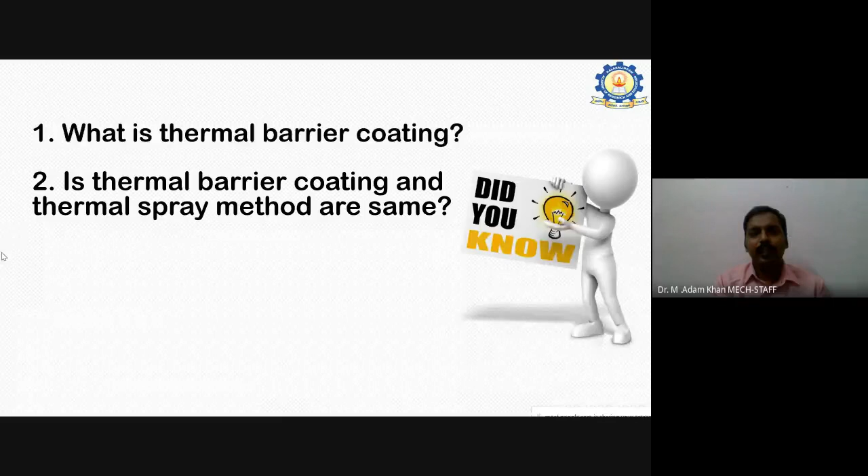Next, thermal barrier coatings and the thermal spray method. Are they both the same, or do they have any differences? Because people used to say, when we go for any coating, I have applied thermal barrier coating. What is called thermal barrier coating? You can go for different applications, different materials, but the application is different and the process is different. Okay, so do you have any confusion in this, any conflict in this? So you should be very clear on these two, right? So thermal spray method and thermal barrier coatings, are they the same? That we have to understand from this lecture.

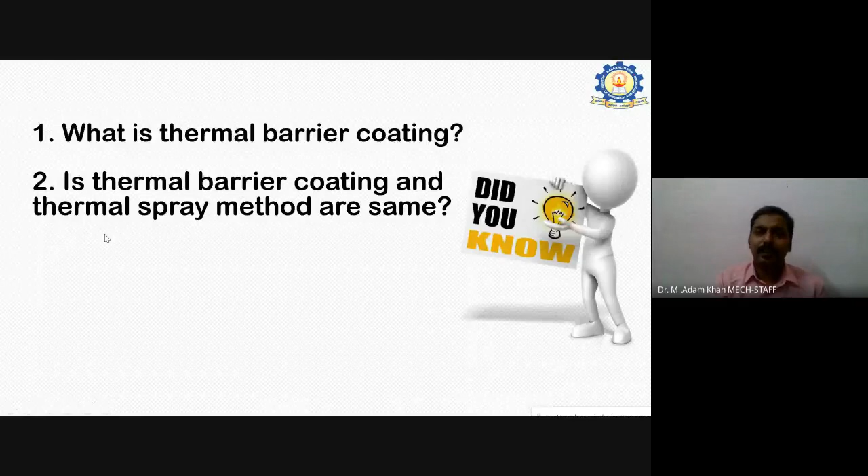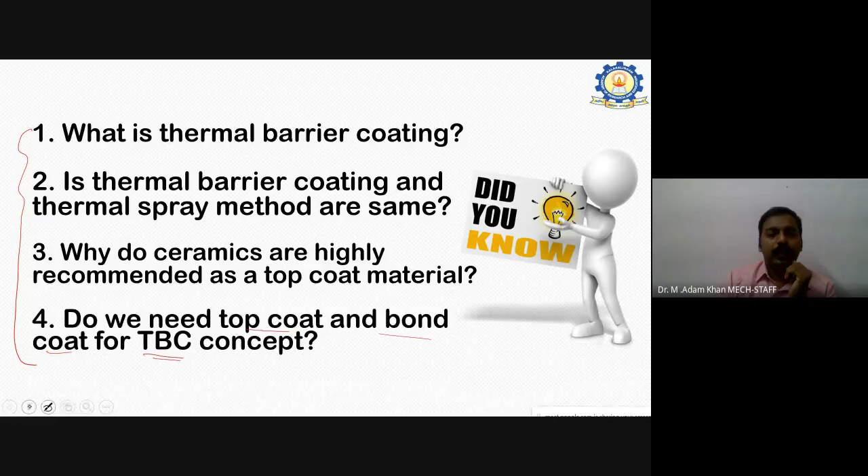When we go out, the sun rays' radiation should not burn our skin. So radiation, or the heat available in the environment, the ambient, should not spoil the natural built structure. So that is the main motto, nothing more than that. If it were for smartness or aesthetics, he wouldn't apply it like this, or it would be just like lipstick or lip gloss. When I was in Johannesburg, people used to walk around with their lip balm. I was surprised. Why would you guys like to take that lip balm anyway?

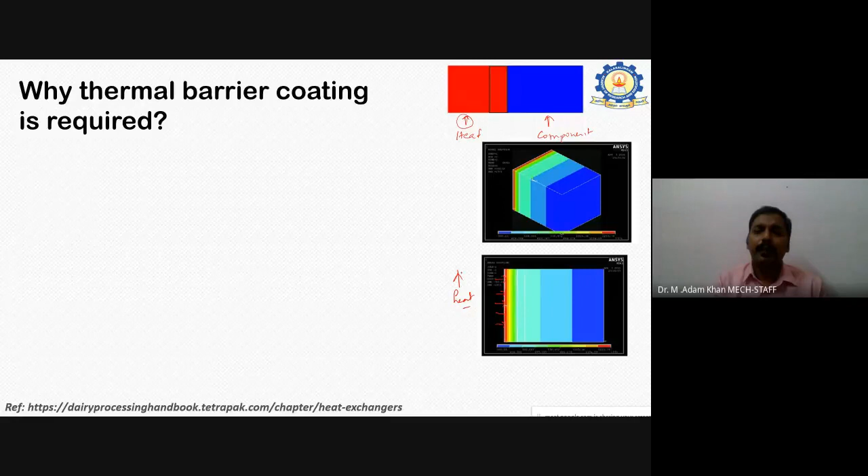So we have to protect this component working at elevated temperatures. For this, they have developed the thermal barrier coating. Just like the simulation, this is the main explanation. You can see that this is X temperature, and this is the component, your work or substrate, whatever it is. It is subjected to some X degrees centigrade, for example, 1000 degrees centigrade.

If it is at 1000 degrees centigrade and the material is directly exposed to this condition, what happens? If it is iron or nickel, it goes directly to recrystallization or some melting phase. So metallurgical phase transformation is directly involved, and the metallurgical deformation and degradation starts. We cannot expect that component to have a reliable life. To increase the reliability of the life and to reduce the temperature, they are producing these barrier coatings.

This is called the top coat, coating 1, and this is called the bond coat, coating 2. The top coat will mostly be a material used as an insulator or a packing material. So ceramics are widely selected, since they try to dissipate the heat maximum. That is why ceramics are widely used in the top coat. So the heat will be suddenly reduced by some amount Y, so X minus Y.

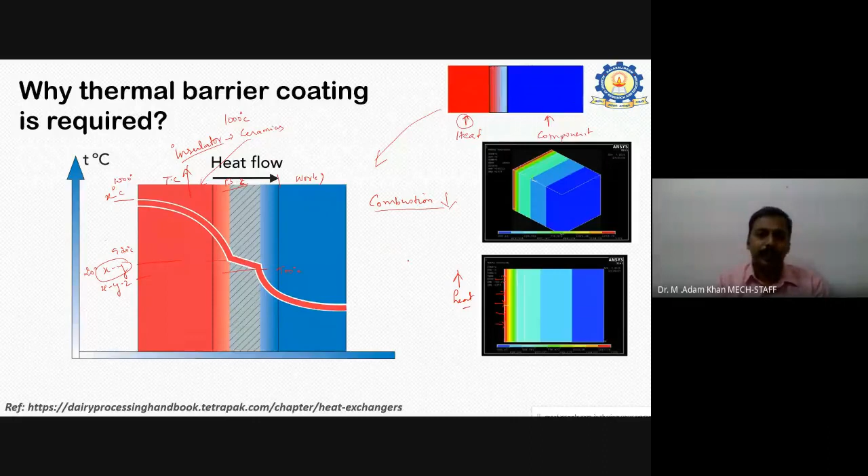Since we are going for thermal barrier coatings for high temperature, elevated operating conditions, thermal barrier coatings are used in the hot section. This is a good example for a turbine blade.

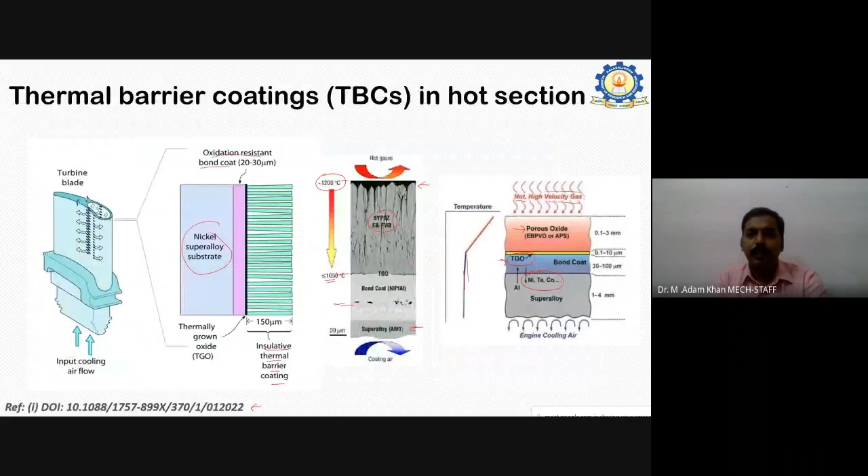The gaseous state process includes ion beam assisted deposition, chemical vapor deposition, and physical vapor deposition. Mostly people go with physical vapor deposition for coatings. This is also possible, because this coating which I have shown here is from an electron beam physical vapor deposition process. I'll show you why PVD and thermal spray techniques have controversies - I'll explain that, which is the main motto of the research.

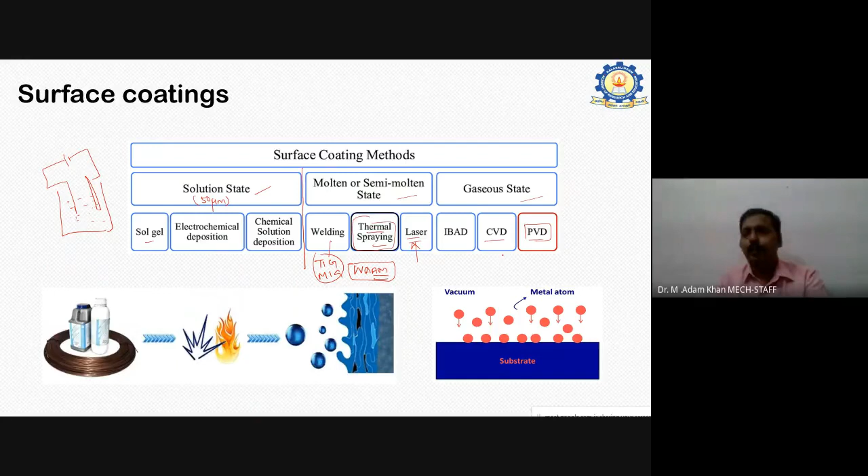Surface coating has different material concepts, and each has its own uniqueness. With this laser and welding process, you can coat stellite materials, steel concepts, stainless steel, nimonics - all metallics can be done here. Even nickel is tough here, somewhat, but the removal of residual stress in this laser process is a main issue, though we can do it to some extent. Then electrolysis plating, just as normal as you do it in the chemistry lab - this is a very common one.

Digging mines will be having hard abrasives in that, sulfur content will have to be there. So different environments are focused, and for that they have done thermal spray coating only. Okay, so CVD, PVD is another concept.

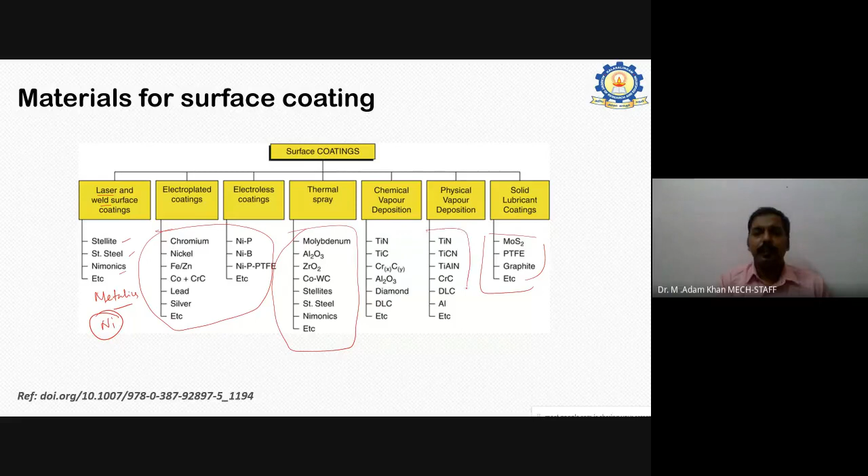So here PVD and thermal barrier coatings are the two main topics which I used to focus, and they have given wonderful contributions in the research of high temperature corrosion studies.

Okay, so materials for thermal barrier coatings have three stages. As I said, it has one top coat, second is called bond coat, another is called substrate. So top coat, maximum the people use ceramics. All types of ceramics are widely used. What is the main reason? The only thing is it is an insulator, it can reduce the heat.

It can reduce the heat, the latent heat of transformations. It will be controlled, it doesn't allow other elements to pass very fast. It has to protect the component in such a way, just like powers, that is just like a ninja power or ladies superhero powers, just like that.

So bond coat is to protect the component. This will protect from the environment, this will protect the material. This is mainly for oxidation.

Okay, so that is why corrosion resistant materials are widely used. Chromium, nickel, cobalt, these are the main components. They are highly resistant towards oxidation and corrosion, and these are highly resistant for thermal insulating. These two are widely used as the top coat and bond coat.

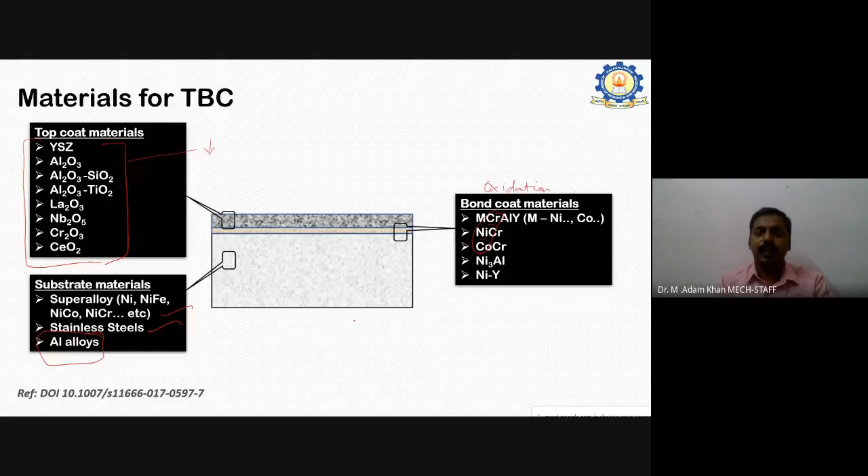So to control that, aluminum structures are also done. So we have just stepped on that to do something else, so even aluminum can be done. Only thing, we should not try this TBC with magnesium alloy, because pre-processing is very important there. This TBC is at heavy temperature, I'll show you the temperature rating. At these temperatures, this magnesium alloy does not have stability, it will burst, and it should not be a trial job, or there should not be any blasters happening recently in a global scenario, just like that, it should not be there.

So thermal barrier coatings are classified in different ways, just like combustion method, electrical method, and high pressure method. Combustion is nothing but there will be some detonators or igniters. In this, D gun, detonation gun is used. So maximum explosives are used as combustion material here, they are otherwise called the D gun process.

Okay, detonation gun. Flame spray, normal gaseous fuel or any sort of liquid fuels can be used. So flame guns are highly used here, they can use the materials in the forms of wires or powder. So this is the second stage.

Third is called high velocity oxy fuel or high velocity air fuel. So for velocity, they are using oxygen or air, fuel can be anything else. So with the help of fuel, any sort of fuel, you can increase the heat energy to fuse the material and deposit it. I'll show you how it has been done.

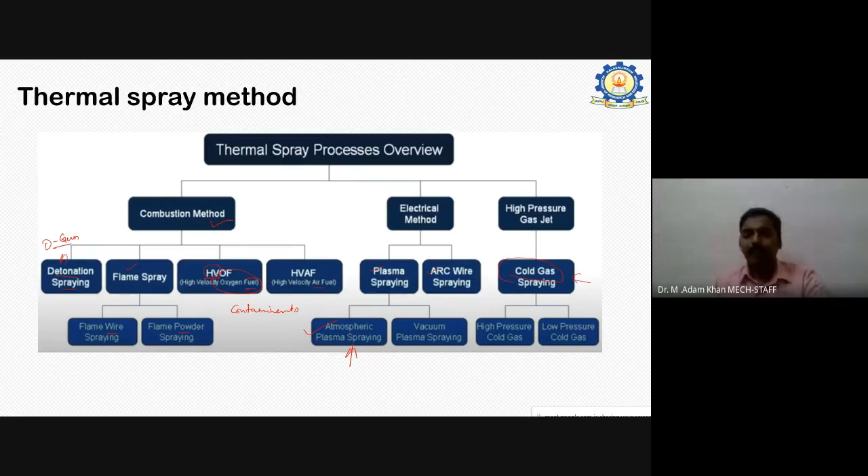The people in India working on the cold spray method are very few. If you're interested, you can try to do that. There are no issues. It's a challenging one for the beginners.

Okay, right. Next is coating materials. The thermal spray method, I'm going to explain it here. The first one is called coating material. Coating material may be in the form of pellets or a wire or a powder or whatever it is. That material should be selected, and based on that material, you have to select the process. That's a very important one.

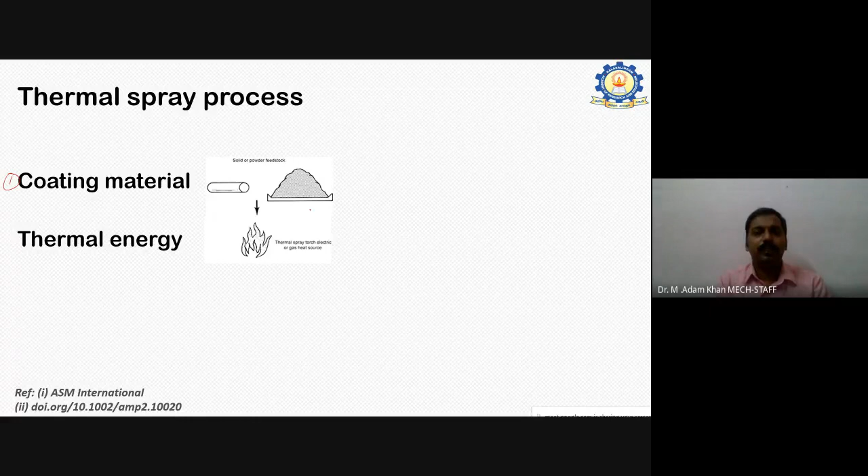The process is nothing but the heat energy, how you are going to generate the heat. It may be HVOF, flame, D-gun, plasma spray, or the systems which are available. If it is metallic, the thermal energy required for fusion will be different than for ceramics. The rate of fusion is different for metallics and ceramics, so based on that only you have to select. That is the second one, thermal energy.

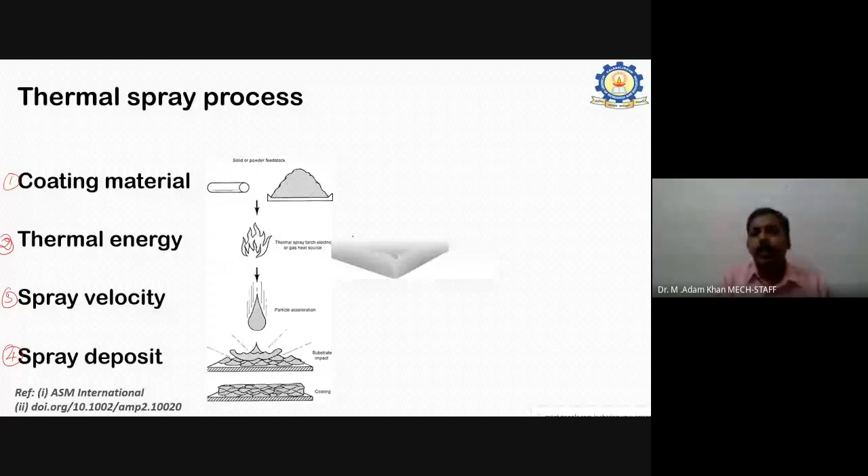Third one is called spray velocity: at what velocity this fused metal will be deposited, just like splats. Then spray deposit, that is the fourth case: how far it is going to be deposited, velocity, what is the thickness or the structure, or the job where you have to place it. So with all these four factors, you are going to make a proper thermal spray process.

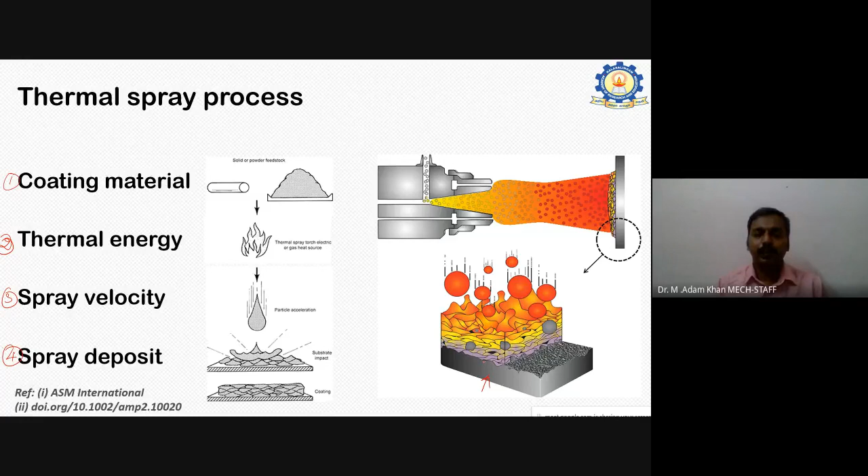If you check the structure, you can see there are so many step-by-step layers, built layers, added layers, which is because of atomized metal particles or ceramic particles fused and deposited at a higher velocity. It will have good metallurgical bonding because pre-treatment will be done around 400 to 500 degrees centigrade based on the substrate. That is the thing which has to be noted here.

Next, there are so many torches. If you are going for flame, it will be one. If you are going for powder feed in the flame, the torch will be one type. If you are going for wire feed, the torch will be different. If you are going for plasma gun, the electrode will be different because it is igniting electrodes, so there is no gas. If you are going for an arc process, you have to give a feed of wire, and then a feed of your heat energy source.

If you're going for cold spray, the concept is different. If you're going for HVOF, you have to give an ignition coil as well as a cooling coil, and then your powder spray separately. So with reference to the concept, there are so many torch facilities, and you have to handle them properly, just like a welding electrode. FST.nl has a wonderful website to teach us more about thermal spray torches.

So what is the torch doing there? In this torch, the material is taken inside in one form, and energy is taken in another form. It fuses it, and the fused metal is blown at high speed to stick it over the object.

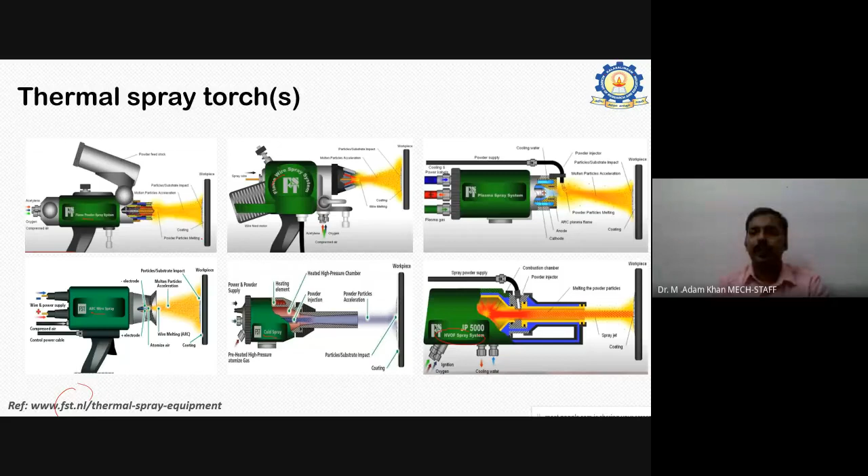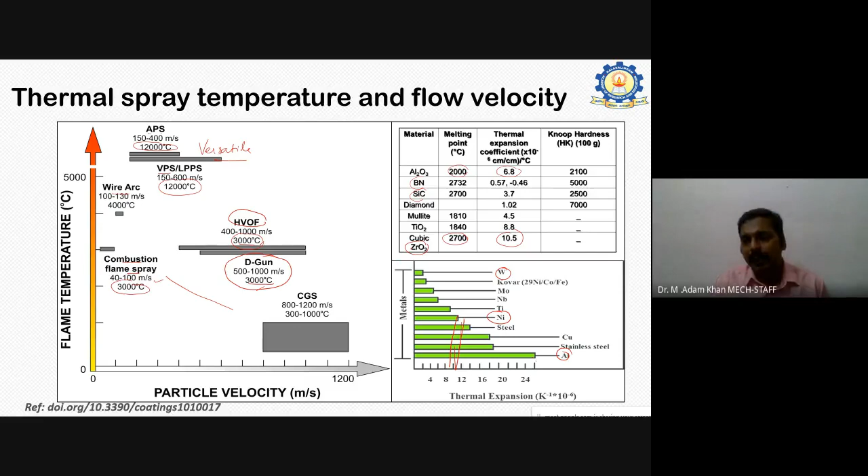Okay, tungsten, it won't expand, very tough. But at the same time, when you go for aluminum, the expansion is high. See, it is around 24. If you go with silicon carbide, it will be just like a reinforcement. So thermal expansion rate is another important factor we have to note when selecting the material as well as the process. You have to note these things. Okay, right? So this is the thermal spray coating.

This is my job. This is Inconel 617, the superalloy substrate, on which I have done two coatings. One is nickel chromium, as well as chromium oxide. I have done two coatings for my research. One is pure ceramic coating, that is alumina and titania. That is why in my profile, Maharajan sir read A40T.

A40T means alumina with 40% titania. Okay, alumina having 40% titania, 60-40 ratio. So ceramic, pure ceramic as one coat, and the second one is called a two-way coating method. One is bond coat, another one is top coat. For the bond coat I used nickel chromium. Second, I used the top coat as chromium oxide here, Cr2O3.

You can see the differences, the ceramic and this first coating and second coating. The main difference is here, there is no ceramic in mine because it is a metallic oxide. This is not a ceramic. This is also pure metallic. So there is no sort of alumina forming even when it is exposed to higher temperature. I have not taken yttria. I have not recommended zirconia. I have not recommended any sort of ceramic forming oxides in my coating. This is the main research I have done in my PhD.

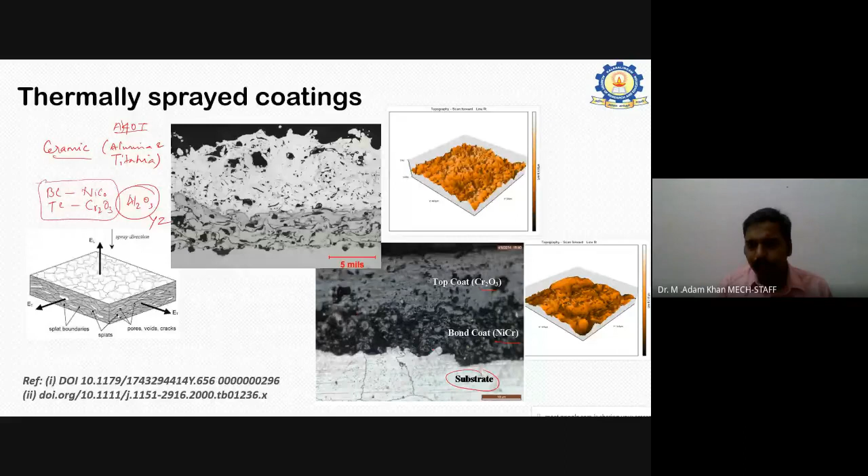So factors to be considered here. I'll say one more thing. While depositing, we have to take care of the splats. What is the thickness? What is the number of splats? The coating splats should be equal. You can see these splats. These are coating splats. I'll show you the top surface photo also. You can see this one, this is oxide coating, and this is metallic coating, how it has been done. I'll show you the same images.

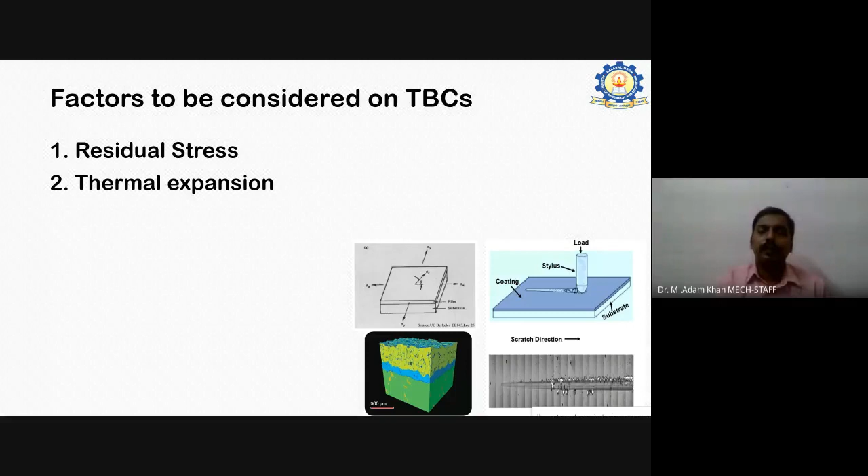So while making any thermal barrier coatings, you should keep some points in mind. One is residual stress because of heating or any sort of thermal cycling. It should not have residual stress. Next is thermal expansion factor. Coating density and porosity, how to reduce it, then adhesion and delamination, oxidation, corrosion, tribological properties.

For example, when we are talking about this, you can say this when it is a bulk. If I'm talking about this one, see this is having two layers here. When it is projected in three dimensions, it is having two layers, just like this. If I talk about the stress of the substrate and coating, sigma x or sigma y, what is happening? This will have a stress with reference to the x and y direction, and this will also have a stress with reference to the x and y direction. So this can be for the coating, and this can be for the substrate.

We cannot say that the strain in this material is the same as the strain in this substrate. Coating strain and substrate strain are different. For example, if I want to check the strain for any bulk material, stress by strain is Young's modulus, so strain is stress by Young's modulus. I cannot equate the strains, but I can equate in terms of stresses. The stress induced here will not vary, but the strain induced in each is different. So when talking about residual stress, you should note whether you know the stress of the coating or of the substrate. If it is known, you just subtract it.

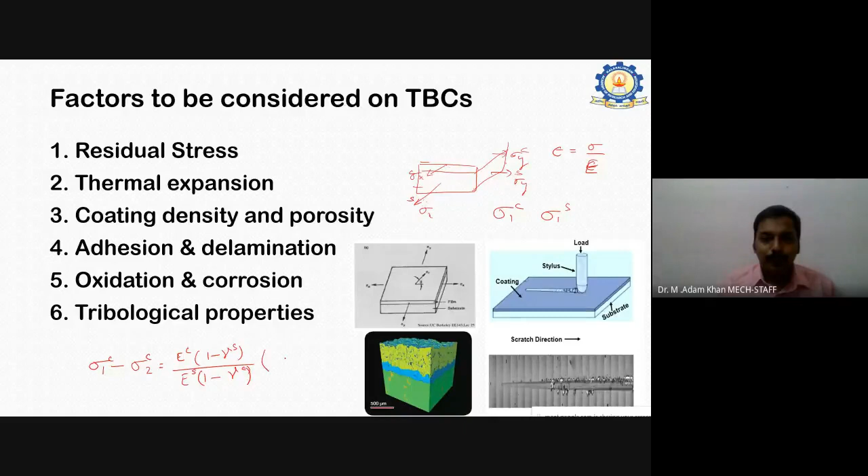If I want to find the stress for this object, I can write it here. So sigma 1 is known. Sigma 1 minus sigma 2 of the coating equals Young's modulus of coating into 1 minus Poisson's ratio of substrate, divided by Young's modulus of substrate into 1 minus Poisson's ratio of coating, into stress 1 of substrate minus stress 2 of substrate.

A very simple relation. This is my current subject which I am handling for my BTech students, engineering stress analysis. If I want to find the difference in stress for X and Y of the coating, I can use this simple relation.

With this simple relation, you can find the Young's modulus of any ceramic or substrate, and you can find the Poisson's ratio of any ceramic and substrate. At the same time, you know the stress induced in your substrate, in the X direction or Y direction. With this, you can find the difference. This is called change in stress. This is very easy. The residual stress can also be found with the help of this formula.

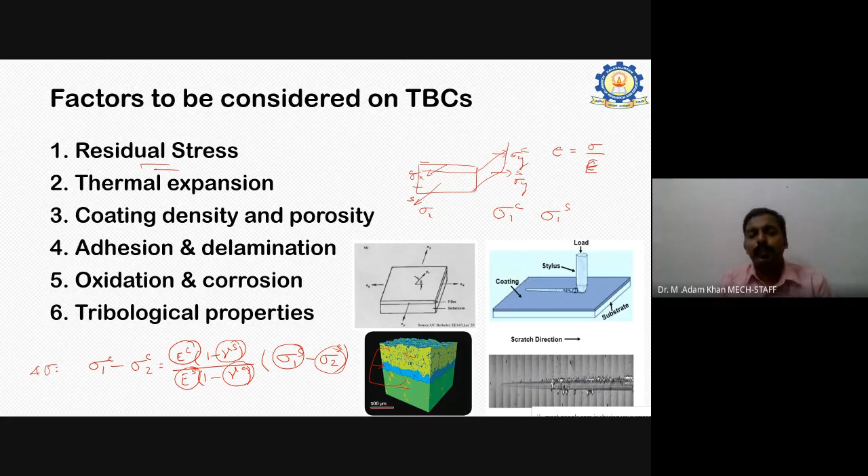At the same time, we should take care of the thermal expansion. As I mentioned in the earlier slide, the thermal expansion rate of the substrate material, coating, and bond coat, you have to take care of all three together before making it. At the same time, you should note whether the adhesion and delamination of the coating is not compromised. For that, we have to go for proper scratch tests, or abrasion tests or indentation tests can be done. Oxidation and tribological properties are the main motto of the research involved in thermal barrier coatings.

Okay, right. So far we have said what is the thermal barrier coating, thermal spray methods, thermal barrier coatings. So far, okay, fine. Understood, I think so. If you have any doubt, we can discuss it. No issues. If you have any doubt, please stop me immediately, because on my full screen I cannot see anyone. If you raise your hand or put a message, I cannot see it. So please unmute and you can ask a question.

So far you have seen the thermal spray method for thermal barrier coatings, but in the early days people used to make thermal barrier coatings with EBPVD, electron beam physical vapor deposition. The structure of a thermal barrier coating developed through electron beam physical vapor deposition will be just like this, a broccoli. At the top, you can see so many pores and voids, which have a higher surface tension to lead the fluids or gases floating over the top surface towards this. Not only at the top, you can see here how the gaps are created in this EBPVD. This is a fresh thermal barrier coating.

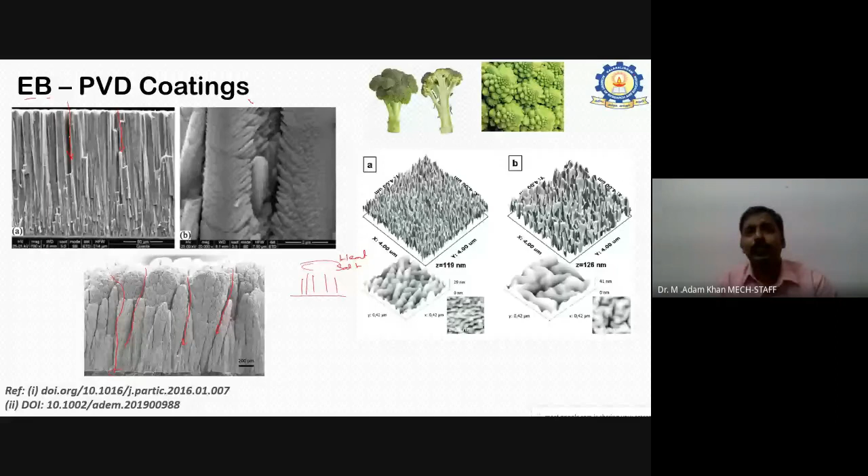So what happens here? When something is left there, it will take the solution or make the elements pass from here towards the substrate, the adjunct layer. Instead of making the surface contact direct, you are creating capillarity for flow to the surface. It may be heat or it may be salt. You're making the oxidation reaction or corrosion reaction speed up. That's all. This was the very common approach in the early days. That is why research turned to making thermal barrier coatings with the thermal spray method. This is the comparison here.

This is the thermal spray method, how it has been done, and this is the electron beam PVD method, how it has been done. In the thermal spray method, you can see the structures in the form of splats. Here you can see the structures in the form of columnar structures. That is the first and foremost difference. Second, the heat energy facing the environment has to travel through so many layers. You can see layer 1, then it has to cross like this, then cross again. It has to find so many paths to travel from the top towards the bottom through so many layers and structures. After that, it has to reach the adjunct layer called the bond coat.

At the same time, here in this case, it is very fast. It has capillarity. If heat energy is produced, all the oxygen will be evaporated. So there will be a flow of fresh oxygen, or the oxygen developed will be taken in by the material. So degradation starts very slowly here, and here the degradation starts very fast. That is why here the thermal conductivity is very low, and here the thermal conductivity is very high. So this is not highly recommended. In the early days people used to make these kinds of coatings, and later it changed to the thermal spray method like this.

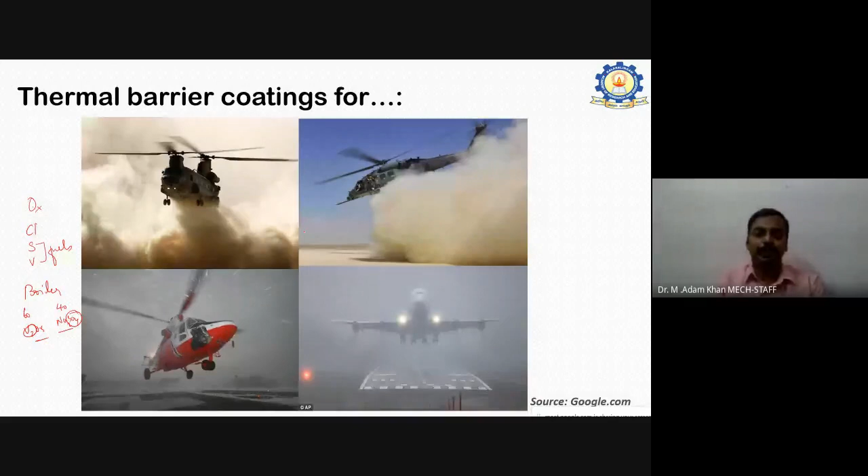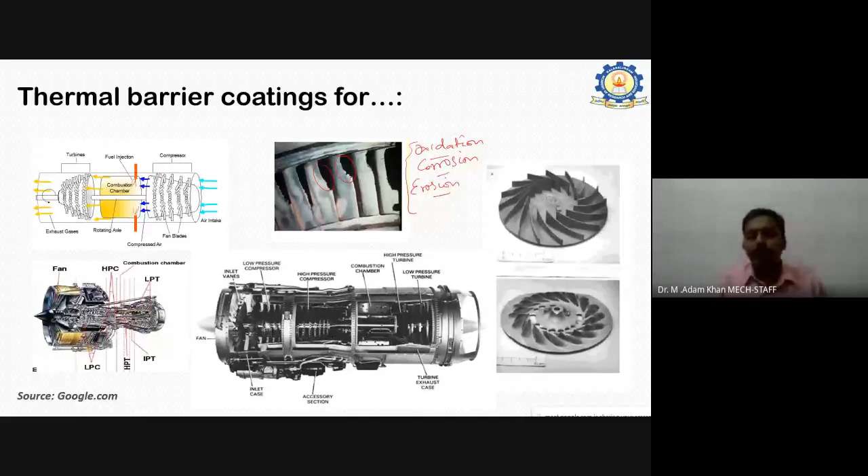It has to face corrosion, and continuous operation will lead to erosion. So these three are the main conditions suggested for thermal barrier coatings at elevated temperatures. This is not only for turbines; you can see it in mines, in underground boring, because there is also that much heat generated while cutting the rocks. Everything is there.

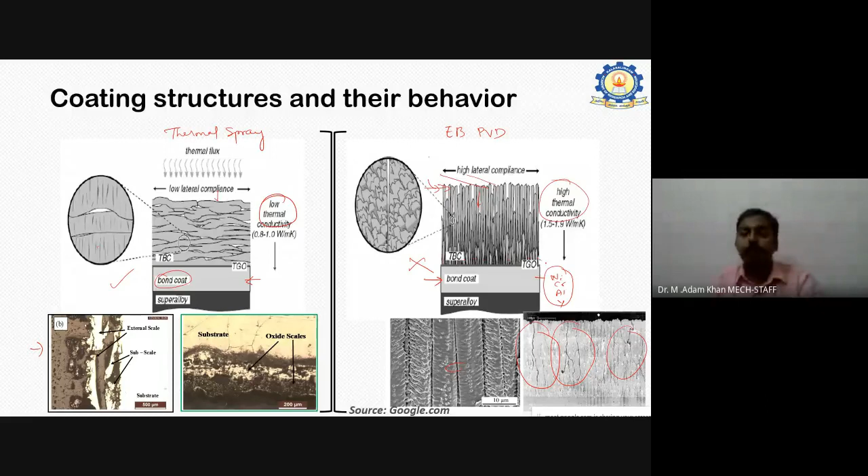These oxides will not be connected to the ceramics because these are metallic oxides, and these are ceramics, so they don't have that much link. The growth of these oxides will proceed layer by layer, and at some point it will break the top coat, and the total component is exposed to a severe corrosion or oxidation environment or mechanical failures. That is the main objective of the research I did in my doctoral time.

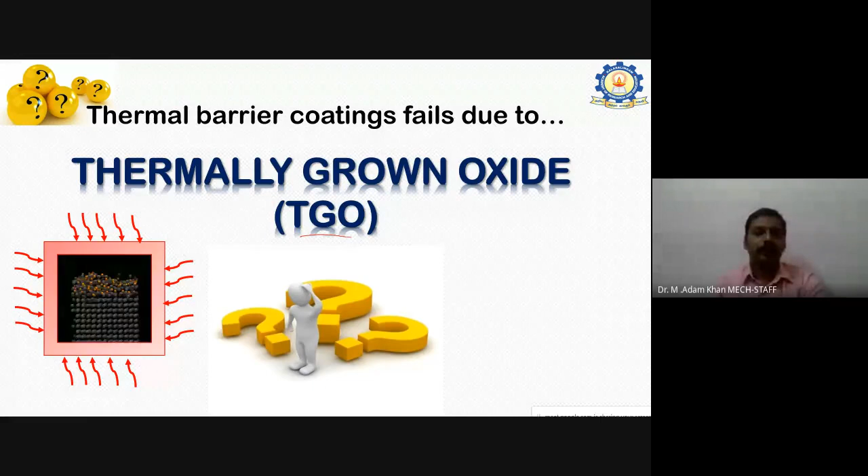Okay, so this is the basic. What is happening? This is the ceramic coat. This is the metallic coat and substrate. The ceramic, as we already said, is porous or less porous, whatever it is.

Sir, your voice is breaking. Sir, your voice is breaking, please.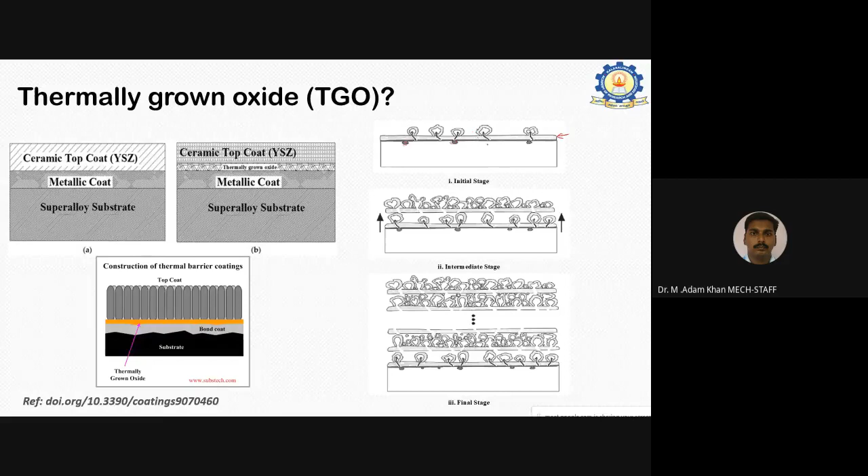How is it happening? TGO is growing, so you can see this is the oxide scale. Sorry, this is the coating, the top coat or ceramic coating. When the coating has these micropores, the oxygen moves towards the substrate, and it starts to make a localized corrosion at the pores or voids. It will produce a uniform corrosion called an oxide film, that is called TGO.

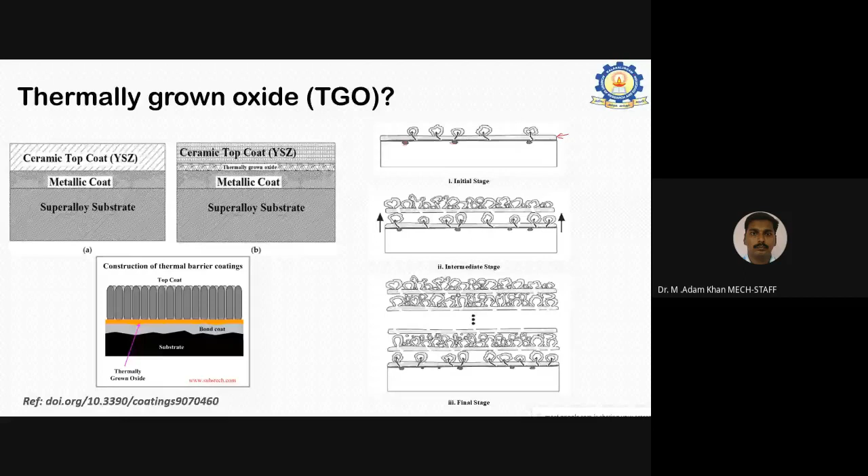When the oxide grows up, what happens? It will shift this coating layer from the substrate to the top, it will raise it, just like a mushroom, and it takes up the coating out of the bond coat.

What happens to the bond coat next? If the top coat is gone off, that's all. All the heat exposed will be directly imposed towards the metallic bonding, and oxidation starts rapidly. So continuation of this exposure will produce a multi-scale oxidation.

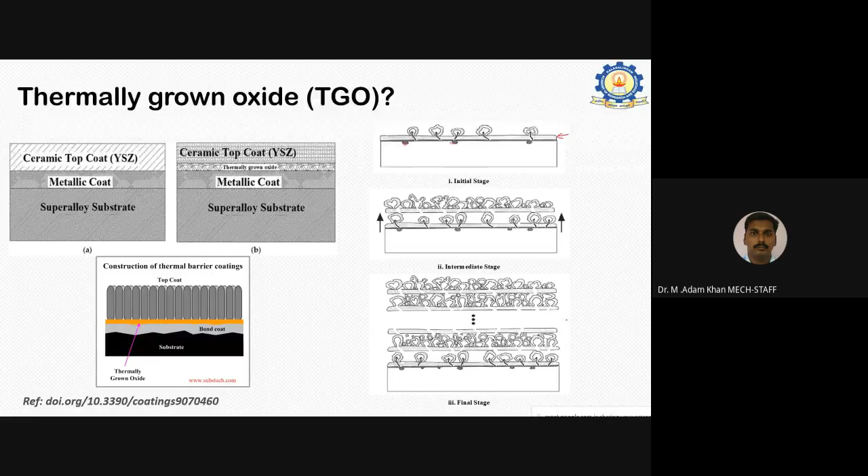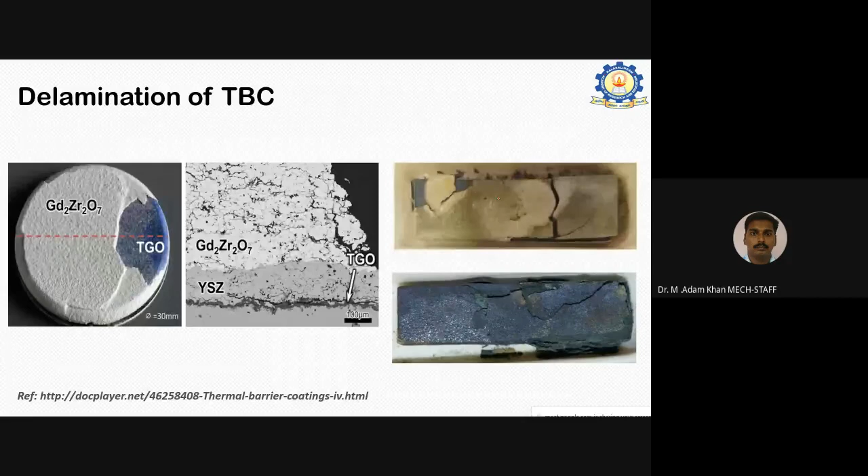So what I have done in my research is two coatings. One is called alumina titania single coat, not a double coat, just a bond coat and top coat. I have done one more thing, nickel chromium and chromium oxide. I have excluded alumina or any sort of ceramic forming oxides.

If I have this one, conventional nickel chromium aluminum yttrium, when it takes to the oxides, what happens? This aluminum will form Al2O3. If yttria is there, Y2O3 will form. So I've just avoided taking these off as a TGO.

So from the research I found the aluminum content or ceramic contents are the main drawback, or they are the culprits that make this TBC fail the fastest. So I just decided not to use these culprits here in this condition. Culprits means, for example, I'm telling for these conditions.

So next condition I have taken pure alumina titania. People used to say that titania is a self-cleaning material, and yes, it is. It won't allow any sort of salt or anything else to accumulate, because of heat it will be exposed. So adding titania will increase your density and reduce your porosity. That is very important.

So before doing my research, I could see Al2O3 plus 13% TiO2, 13% titanium oxide being used. After that I thought, why minimize the titanium? Why not go with 40% titanium? I thought this titanium may increase the bonding strength as well as reduce the surface tension, giving the self-cleaning property. So I did that 40T, that is alumina with 40% titania.

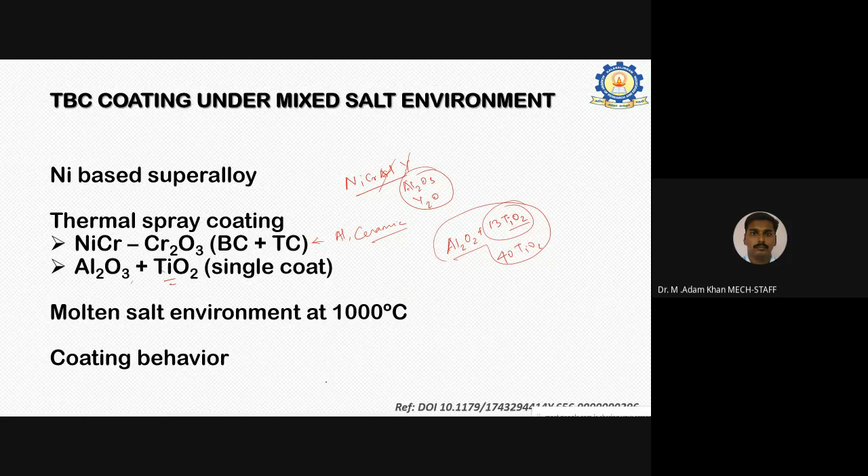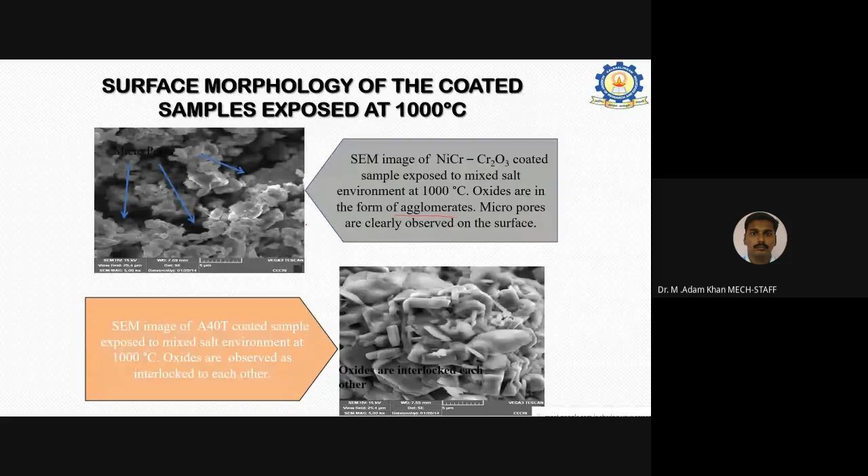When it is exposed at 1000 degrees centigrade, you can see these oxides are in the form of agglomerates. Micropores are very clear. And this is for alumina titania, see how this coating has turned out like this.

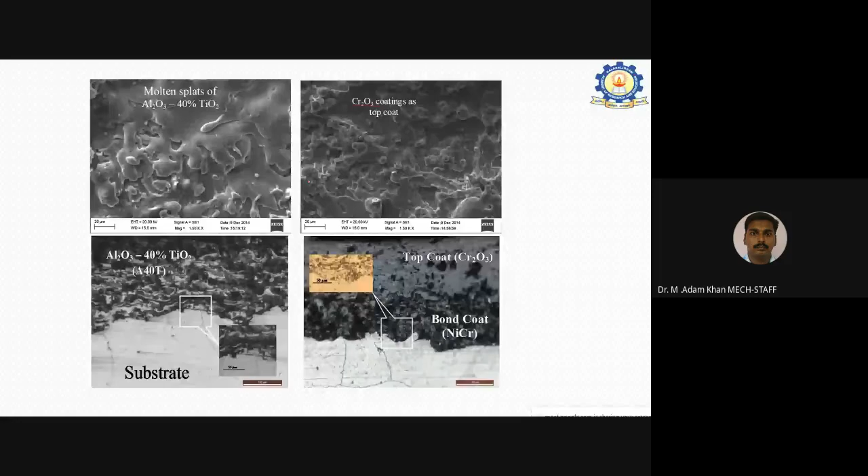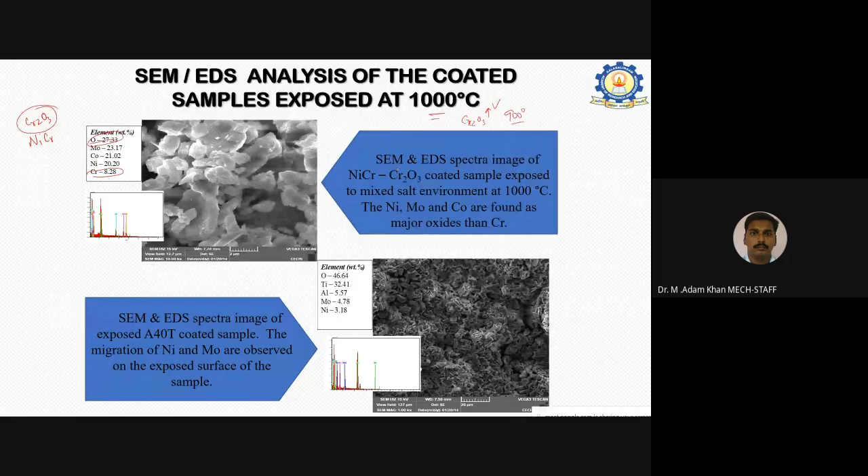One more thing I noticed here: I had chromium oxide and nickel chromium as the bond coat. So this is 100% oxygen and chromium. You can see chromium has been lost. At elevated temperature, chromium has a wonderful material property. When it crosses the eutectic limit around 900 degrees centigrade, chromium oxide, Cr2O3, starts to evaporate as a vapor. That evaporation protected my surface for a long tenure. After that evaporation only, my coating got sustained.

So this is the cross section. This is the substrate, this is the nickel chromium bond coat, and this is called the top coat. The other things are epoxy. At the same time you can see this is alumina titania, so this is ceramic as usual. The ceramic plays a part to make micropores inside to form a TGO. So this is called substrate, and this level is called TGO. For the same condition, see the behavior, how it has happened.

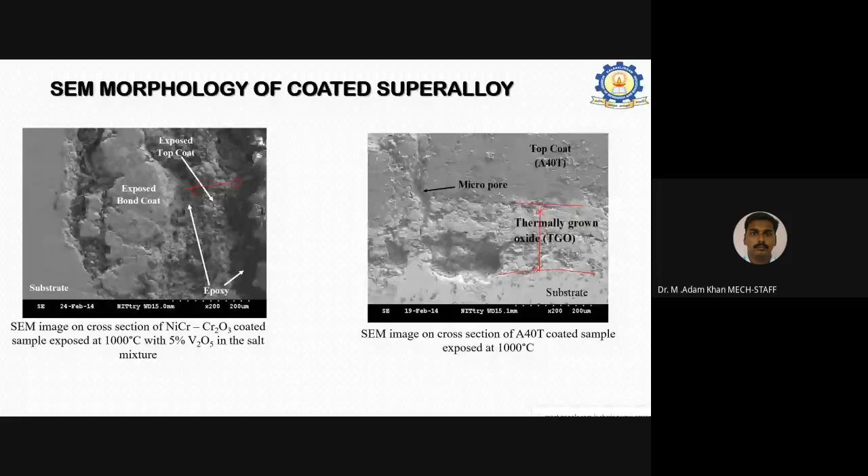Here, the topmost chromium oxide layer has elapsed. So just to identify again, I have done EDAX results here. This is called epoxy, that is why it got charged while taking the SEM micrograph. So exposed to top coat, and the pores which formed here have taken up. There I cannot find any TGO between these two or these two elements. I can only find migrations of the elements. That's all, so this is the mechanism involved in my research.

At the same time, here you can see this is pure alumina titania. Alumina has come down and nickel has gone up. The transformation of nickel aluminide, just like that, has some transformation. It has reached a stage to form TGO over a certain thickness. What happens when the TGO grows up maximum? It will break my coating and spoil my component very fast. So that is the final outcome of the work. To avoid this, we suggested that nickel chromium oxide coating has a better life compared to alumina.

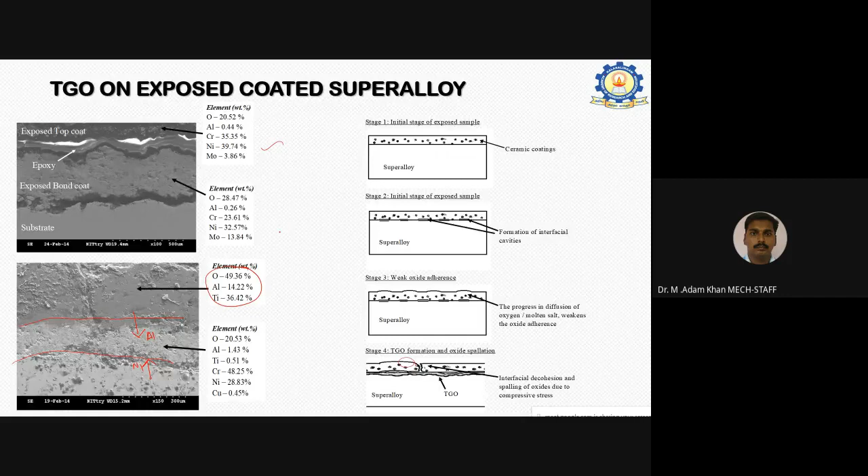Alumina titania has special features like self-cleaning. I have applied the same thing for erosion studies, because the component is going to face erosion analysis. This is my own research work published in the International Journal of Minerals, Metallurgy and Materials, IJMMM journal, so you can refer to it. This is the base metal on which the coating has been done, alumina titania coating. As it has a self-cleaning property, I chose this one, the pure 100% alumina titania coating.

Before and after erosion, you can see what happens during erosion. The hard particle available in the environment will be chiseling or sliding towards the object to remove the job. This is what happens. But to avoid this, we have taken a coating. So here, this is the substrate portion and this is the coating portion.

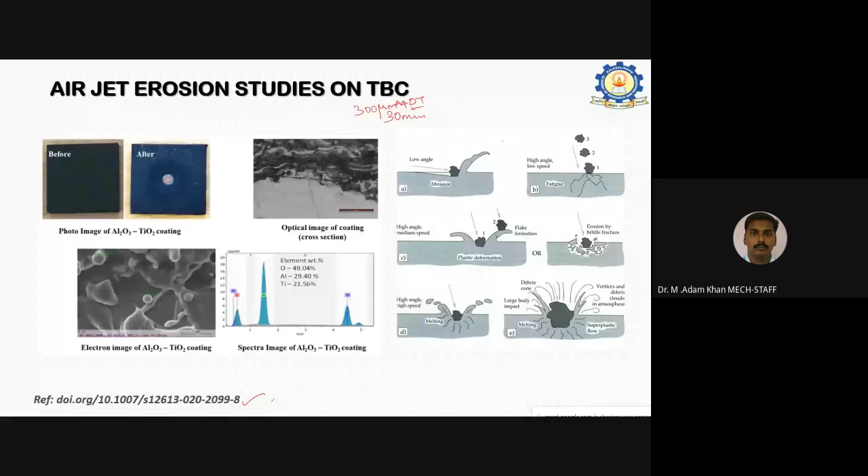After 30 minutes, this is for 300 micron A40T coating for 30 minutes at 90 degree. This is very important, the angle of impingement varies differently. So the structures, how far it has been done, everything was found. When the material flow is increased, automatically the erosion rate goes up. At the same time, this is alumina, and some sort of clinching effect was also noticed. Some hard particles can be seen adhering over the surfaces. That is the main outcome of this research.

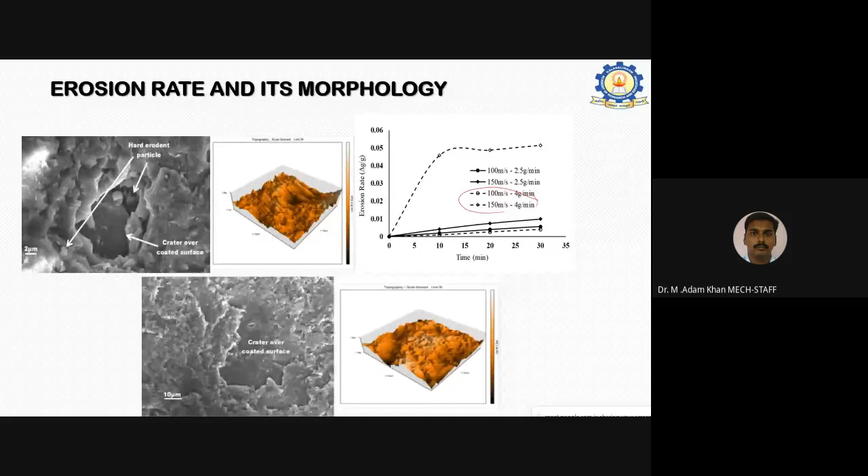I checked this for both coatings tested with scratch test. Both coatings exhibited around 120 Newton to 12 kilogram force to maintain a good coating. I cannot find any major distractions around that, only some sort of distractions. Other than that, serrations are a little bit present there, nothing more, but it has not damaged my job. That is the main thing I observed from this.

So with this, I wish to stop. I have given a wide coverage of thermal barrier coatings and its related research in a defined way for wear, corrosion, and oxidation analysis.

Excuse me, sir. Yes. Sir, you mentioned that we have to heat up to 30 minutes. 30 minutes on what, at a particular temperature, sir, for the last point? That is for sliding wear. You are talking about this one, right? This sliding wear, right? Yes, sir. Okay, so sliding wear, it is just like this.

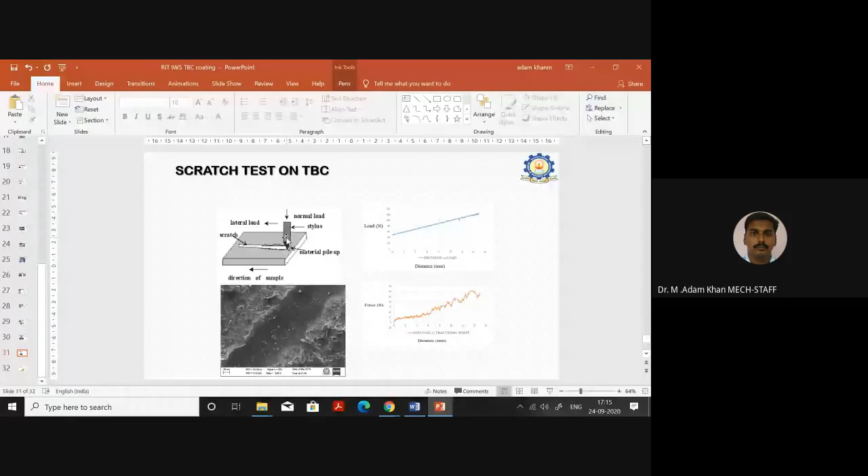There will be a sharp pin made of, just imagine like this. So pin on disc, they call it pin on disc. For example, in a disc, the pin is made to slide for a particular radius for 30 minutes time. For 30 minutes, the pin will be continuously rotating with some sort of load.

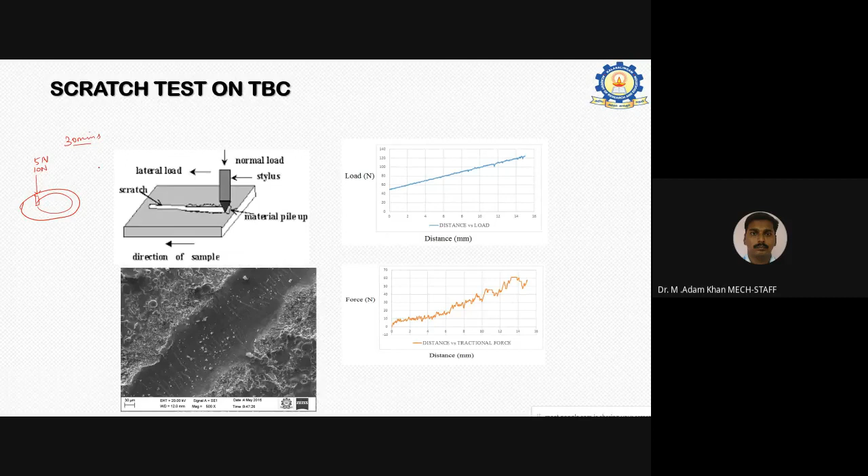It may be 10 Newton or 5 Newton or other things. You can see my papers on that, where you'll get the information I've mentioned. For 10 Newton, the behavior of this material for 30 minutes is noted and presented in that slide. So for 30 minutes, it is sliding continuously like that. What is the maximum material loss happening here? You can see 500 microns, 300 to 500 microns for low weight, 5 Newton to 10 Newton.

Can you see this? For 5 Newton, the maximum loss is 200 microns. This is for nickel chromium. And for alumina, it is around 300 microns. When the load goes up to maximum, it has crossed around 500 microns for 30 minutes time for this much load. So we will be designing for maximum load, 10 Newton, 5 Newton being the maximum load, so that it can bear the working load at the working environment.

Okay sir, thank you. Have you heard of the Rotomac pen writing test? How does it work? It writes for a long time. The nib will be scrolled continuously for some meters of time. Yes, sir, just like that, it will be rotating for some time.

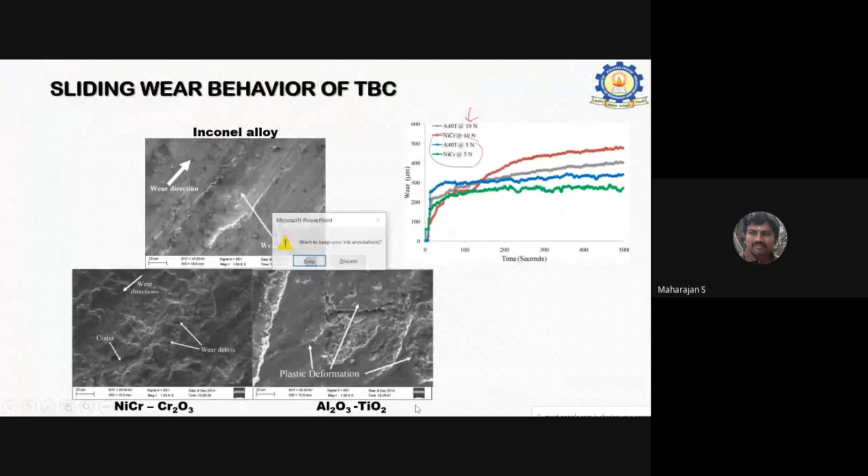Sir, in a power plant, there are so many things. In a pipe exposed to the superheater boiler in the power plant, the temperature rating is maximum. There you have mostly SS 316, 304. Later you have gone to a nickel-based alloy. That fire side corrosion has two important corrosion species called vanadium and sulfur. Vanadium and sulfur are aggressive species which make that material degrade very fast. To protect the pipe from the power side, that is the fire side, coatings are made over the pipe to protect it. So that is the first thing in a power plant area, that is in the furnace area.

The same concept applies to the turbine. In the turbine section, it has to face a high velocity impingement of steam. The steam pressure and velocity are maximum. To face the high pressure steam in the turbine blade, TBC coatings are used, for erosion as well as thermal protection, because the steam will have some sort of oxygen and moisture content, which we have to face. So on both the fire side and the steam side, we have to take care. That is the important role of TBC in power plants.